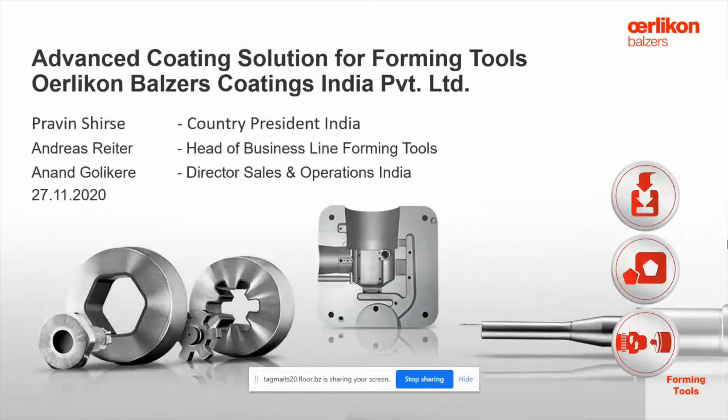I'll give you a brief introduction about the Oerlikon Surface Solution India footprint. We are present in almost all corners of the country.

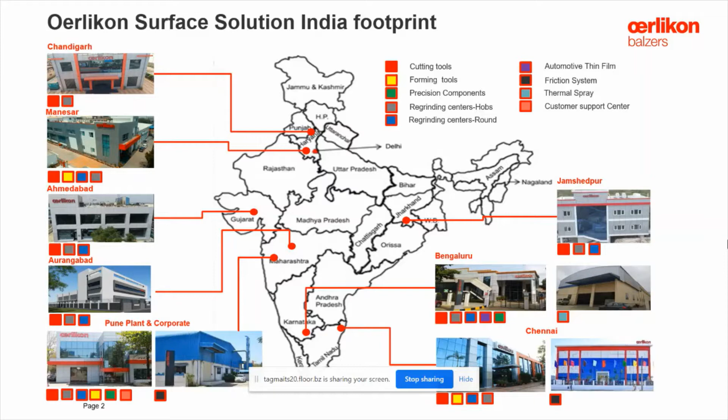All these coating centers are capable of handling various different forming tools. Now I would like to take you through the journey of coating forming tools with my colleague. I'm handing over to Anand Golikere.

Good afternoon all. I'll take you through the surface solutions we provide for forming tools. We provide surface solutions for a variety of applications in forming tools, which includes metal forming tools, plastic processing tools, and die casting tools.

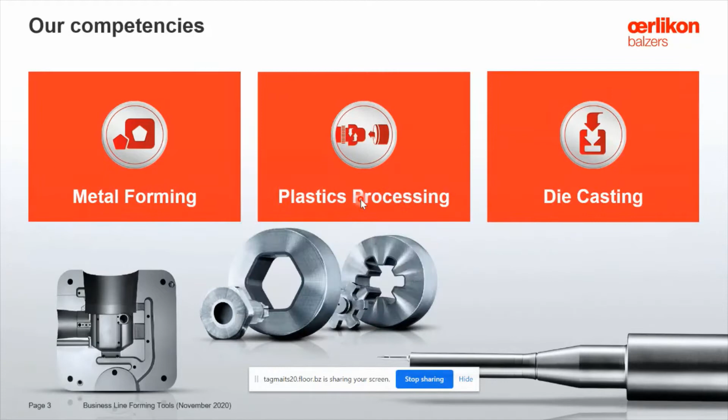Forming tools are treated with coatings under the brand names BALINIT and BALITHERM, which keep the tools in good shape. The main benefits customers get are reduced machine downtime meaning low production cost, longer tool life meaning low tooling cost, and higher workpiece quality meaning significantly less required rework.

This also enables forming of high strength steels or advanced high strength steels, which is the requirement of today's BS6 standard.

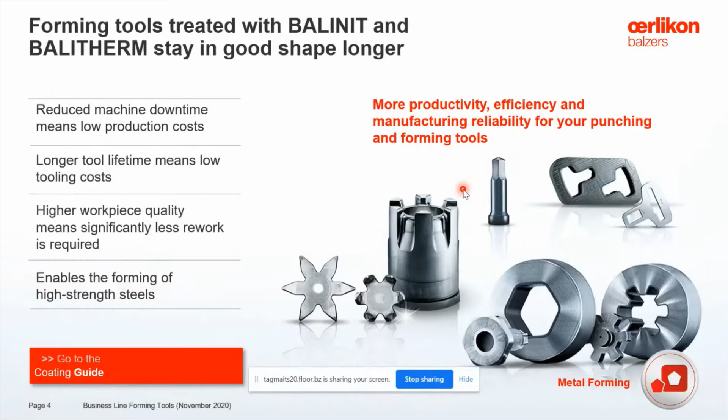With BALINIT and BALITHERM surface solutions, we guarantee more productivity, efficiency in manufacturing, and reliability in your punching and forming tools. We provide solutions for a variety of applications like segmented dies, roll forming, trimming and fine blanking, draw rings, and also large automotive stamping tools.

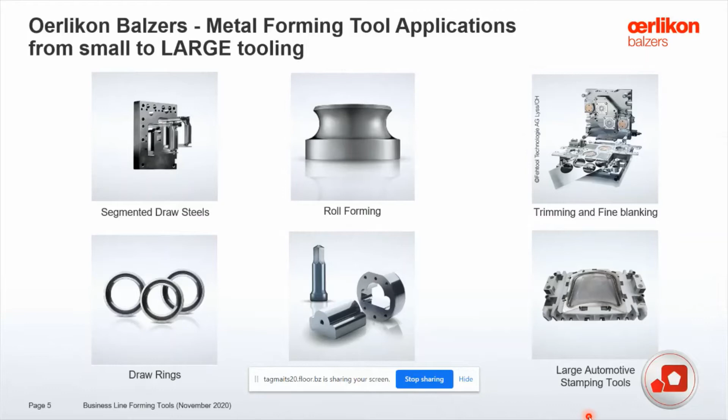Typical surface protection procedures for automotive flanging dies. We have a variety of solutions for the variety of materials to be formed, depending upon the material - aluminum, steel, or advanced high strength steel.

We provide these surface solutions on tool steels, which can be made of different materials, but the most commonly used is cold work tool steel like AISI D2 grade. Here the basic requirement is that it has to be well heat treated, and the tempering temperature should be above 510 degrees centigrade.

We do surface treatment or surface preparation with a variety of polishings, including technical polishing. Depending on the material formed, like aluminium, we have surface solutions like BALINIT Triton or BALINIT Hard Carbon. For steels, for skin parts dies, we sometimes also do laser hardening, and for big tools we have pulse plasma diffusion treatment.

For advanced high strength steels, we have BALINIT Advanced or BALINIT Duplex solutions, which are usually applied by physical vapor deposition coatings, at a process temperature of 480 degrees centigrade.

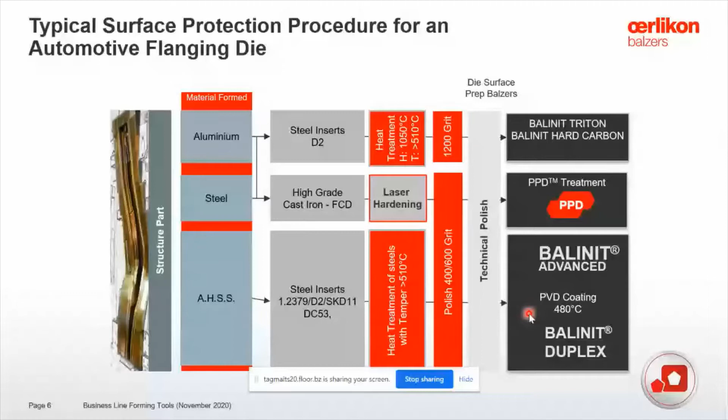Before coating, we have a high level of polishing, and we differentiate the polishing level. In the dies, there are some areas where no polish is required - this is the outer side. In the main forming area, we do technical polishing, and there are certain areas where we require only a technical gloss and not the high level.

We do all the requisite polishing, and for this we have the necessary setups at almost all plants. We have developed 3 competence centers for forming tools, one each in Manesar, Pune, and Chennai.

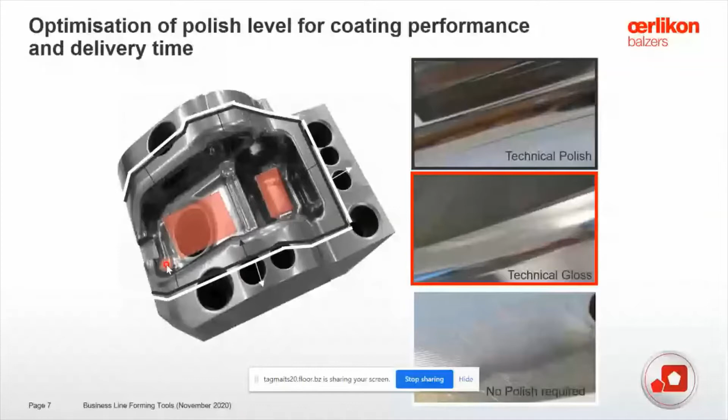Surface solutions on metal forming dies - we have advanced surface solutions like BALINIT Formera, a chromium aluminum based coating. The hardness of the coating is around 28 plus minus 2 gigapascal, which is approximately 3000 Vickers.

This is significantly higher compared to the material formed. Compared to the die hardness, which is around 58 to 60 HRC, this coating is about 3 times harder. The coating deposition temperature is around 480 degrees centigrade, and the color of the coating is light silver gray.

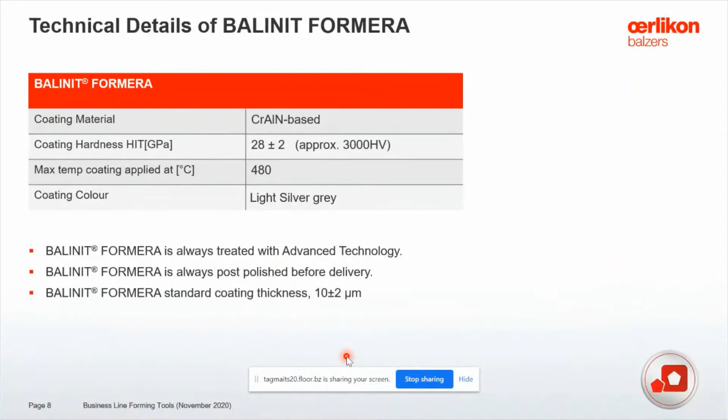BALINIT Formera is always treated with advanced technology, meaning we have a pre-treatment below the surface and then BALINIT Formera on top. It's always post-polished to give significantly higher tool life and top-notch components. The typical coating thickness applied is 10 microns, plus or minus 2 microns.

Some examples or case studies. This is an example for high strength low alloyed 6 millimeter thick forming. Here we are giving earlier solutions of BALINIT XCELL, which was now converted to almost BALINIT Formera with almost 5 to 6 times tool life. And here you can see the tool steel is K340, and this is also nitrided.

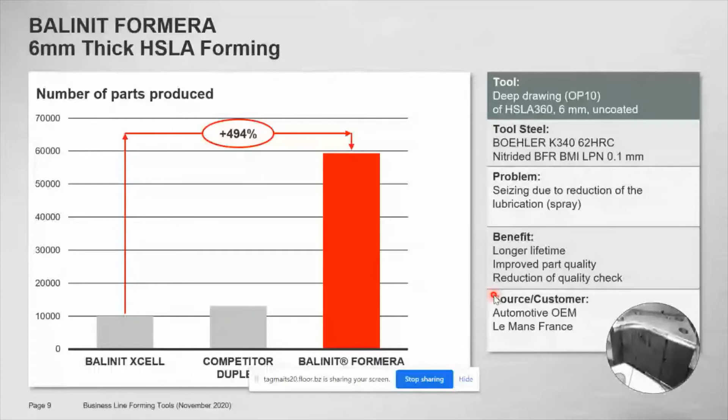The main problem of seizure due to reduction in lubrication spray was achieved. The customer benefited with longer tool life, improved part quality, and reduction of quality checks. The tool can be used for significantly longer time without mean time between maintenances.

Another example for BS6 standard automotive, we have high strength steels. This is an example of 960 megapascal, 2 millimeter thick deep draw. Here, the competitors were providing CVD treatment, chemical vapor deposition, commonly used in the past. But with our solution of BALINIT Formera advanced, we could give almost 8 times tool life to the customer. Short tool life was the major problem, and here we gave more than 8 times, and this is a customer in our UK facility.

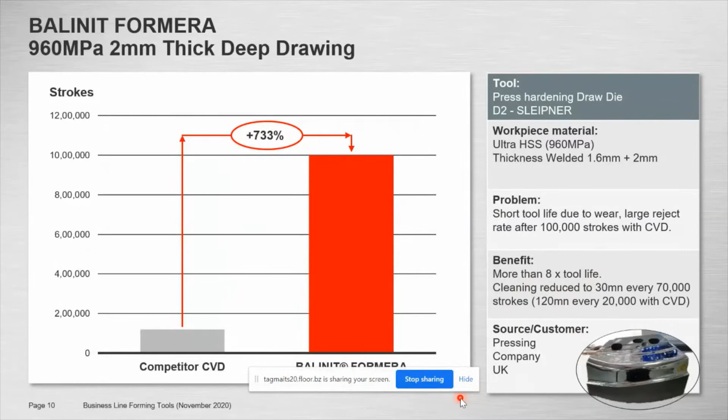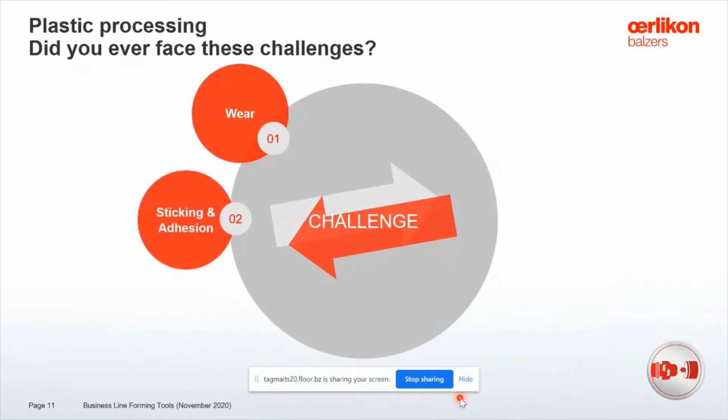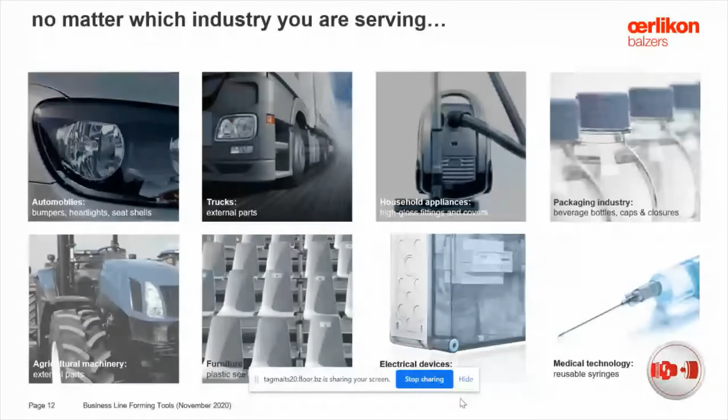In plastic processing, we have a variety of problems like wear, sticking or adhesion, frequent cleaning cycles, bad release properties or difficulty in ejection, sometimes corrosion due to additives in the plastic, and also scratches. No matter which industry you are serving, maybe automotive, trucks, household appliance, packaging industry, farm equipment, furniture, electrical devices, or medical technology, Oerlikon Balzers can solve your challenges in a variety of applications.

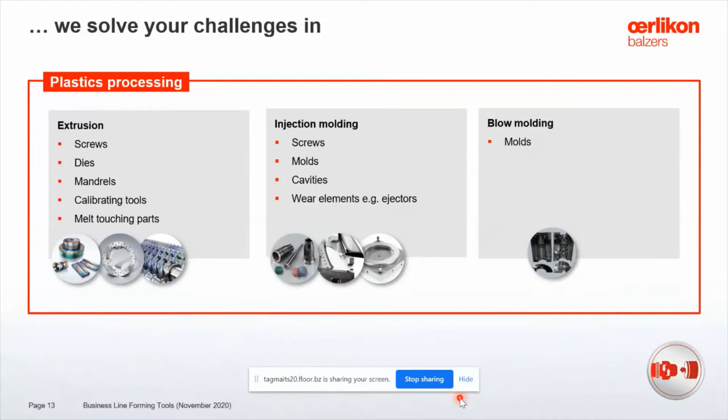In extrusion, we can coat screws, dies, mandrels. In injection molds, we can also coat screws, molds, cavities, and molds for blow molding. For the mold cavities, we provide protection against abrasive wear, corrosion resistance, and also against deposits and sticking. Improved mold filling and easy demolding is the added advantage one can get.

For the moving elements, we have special coatings like diamond like carbon coating or hard carbon, which we can also run lubrication free, especially in packaging industry or medical industry. The surface solutions for significantly higher life are applied by PVD, and we have a variety of solutions like BALINIT D, CROMA PLUS, LUMENA, or BALIQ TISINOS.

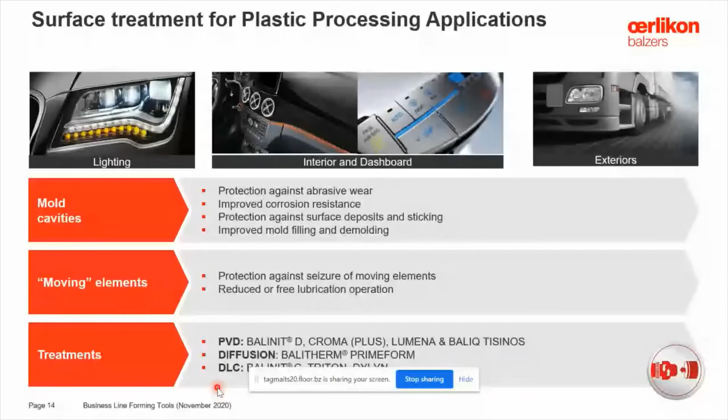The diffusion type, we have BALITHERM PRIMEFORM, and for moving elements, sliding elements, moving cores, we have diamond carbon coating, which has metal containing BALINIT C, or metal free diamond like carbon coating like BALINIT Triton, or special for packaging industry BALINIT DYLYN.

BALITHERM PRIMEFORM is a maintenance friendly surface treatment. Typical hard chrome coated tools, if the tool gets damaged, people also do welding, but the welding is below the surface and the surface treatment above cannot protect the area which normally gets damaged. But with our PRIMEFORM treated, maybe a P20 tool steel with 32 HRC, the prime form treatment is below the surface.

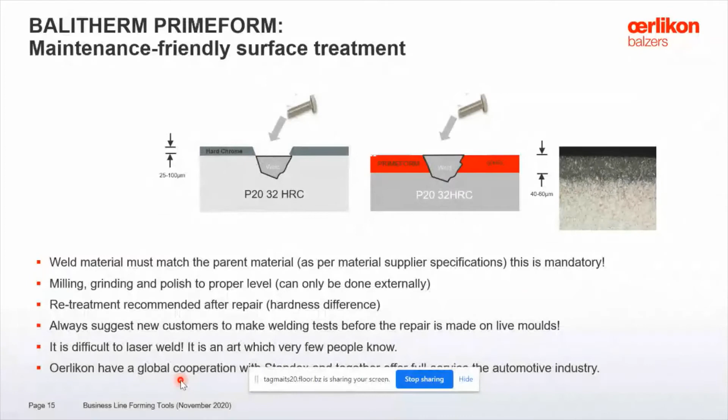Even with damages, the weld will be at the same level, and we can redo the treatment for protection of dies. So this can be maintenance friendly. The dies can be maintained, or even if there is an engineering change, this can be incorporated with BALITHERM Primeform treatment. Of course, it is difficult to laser weld, but we have recommendations based on that. We, Oerlikon Balzers, also have a global cooperation agreement with Standex, who are the leaders into mold maintenances and surface solutions as well.

Example, we are working together for mirror polished molds for automotive big lighting molds. You can see here the level of polishing which is maintained. We are coating these molds in a typical coating cycle. You can see here the picture.

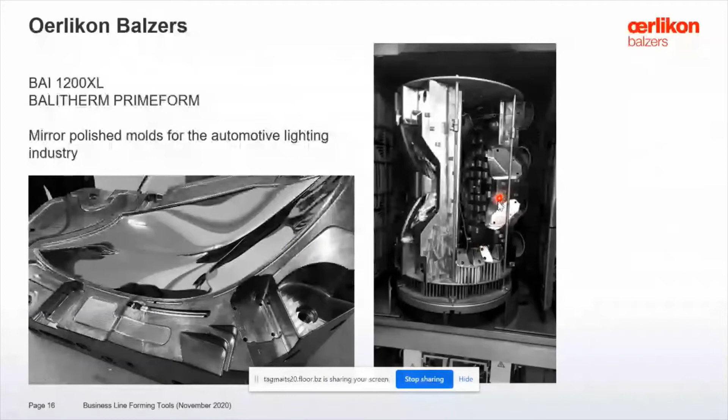After BALITHERM Primeform, the customer experienced improved part quality, lower injection pressure, less residue deposits because the treatment itself forms a protective layer and separates the melt from the tools. The mold cleaning cycles or intervals between maintenance are significantly increased.

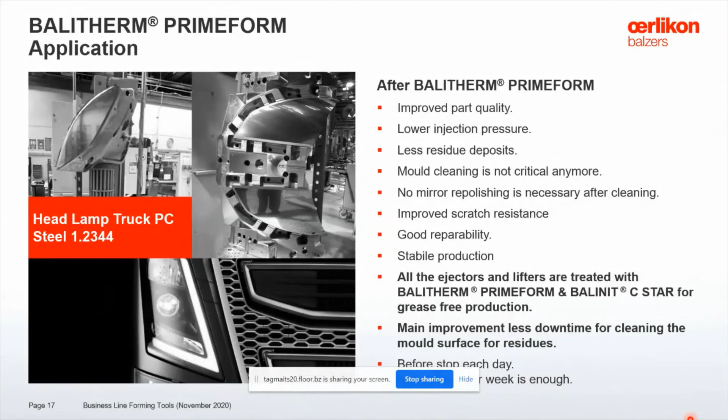Here, all the ejectors and lifters are coated with BALITHERM Primeform and BALINIT C Star to make it grease-free or dry lubrication or dry running. The main improvement is downtime. Earlier the mold used to stop each day, and now it is going without stoppage for even more than weeks together.

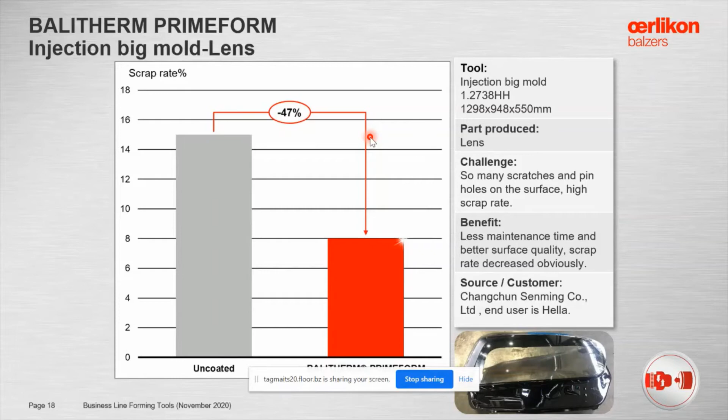This was an example from China, just an example. The tool steel was 2738 high hard material. It's a lens, so many scratches and pinholes on the surface. After treatment, almost the scrap rate is reduced by almost 47%. This was a customer, end user is Hella, which is also a leader into lighting molds. So these benefits can also be provided here.

Coatings, we have another range which is applied by BALIQ, a new technology called scalable pulse power plasma. This combines the advantages of arc treatment and sputtering, HiPIMS, and gives the smoothest coatings with this technology. Even this technology is available in India at our Pune plant.

To give an example for BALIQ TINOS, this was a case where the mold material is hot die steel, and it's a dust container. The polymer is polycarbonate or ABS, and the problem was cleaning and repolishing after every 500 shots. After TINOS, we could double the life of the meantime between maintenances, and even after 100,000 shots, the cleaning cycle is very easy and simple - just ultrasonic, you can reuse the mold, no major polishing required. The hardness of the coating is around 2,800 Vickers with 2.7 gigapascal residual compressive stress, and the friction coefficient gets reduced to 0.6, which helps in easy ejection of the molded components.

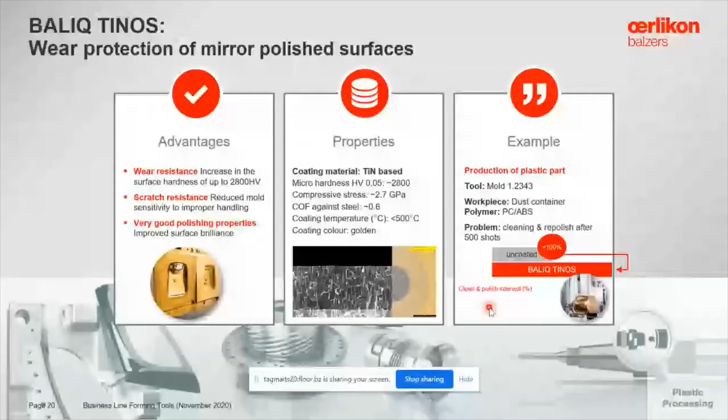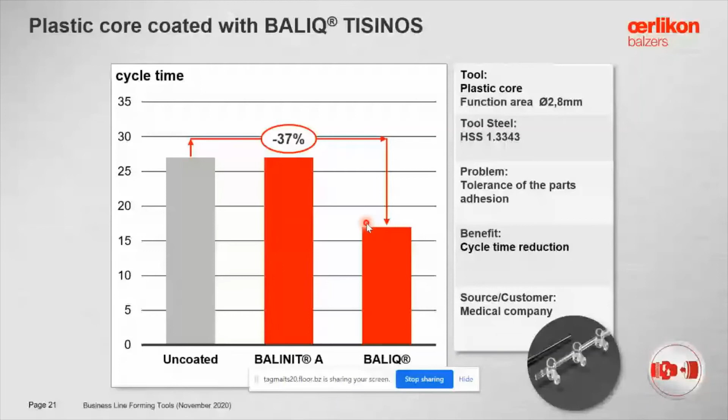We have special coatings like BALINIT CROMA PLUS, a strong performer for rubber and plastic forming. This provides high level protection against abrasive and corrosive wear. It's a multi-layer structure with more than 28 to 32 layers with very good sliding behavior, chromium and chromium nitride based for better corrosion resistance. The coating has a max service temperature of 700 degrees centigrade and has a rainbow color. We recommend this coating especially for PVC molds or rubber molds.

Here's an example: the tool steel is hot die steel, and this is an NBR seal ring. Here we prevented deposit formation, greatly reduced the sticking, and achieved excellent protection against scratches - almost a 3 times life improvement.

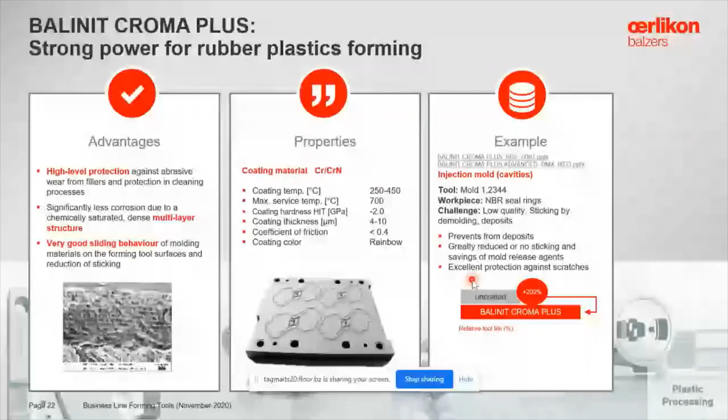Another example for injection mold for rubber, this time with a different rubber, EPDM - glass seals for automotive. Here we saw frequent shutdowns; the challenge was frequent shutdowns due to mold surface sticking easily. But after coating with BALINIT CROMA PLUS, we could improve the tool life by almost a factor of 5 times more life. This is also a customer from China in Wuhan, Hutchinson Automotive, for rubber products.

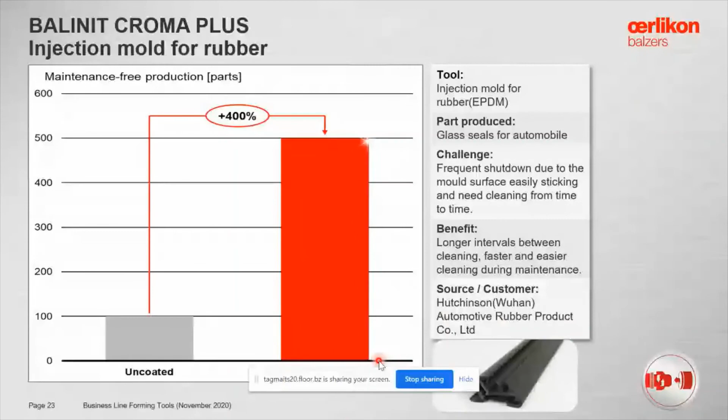In metal die casting, we also provide long-lasting, more productive manufacturing reliability. Here the reduced melt alloying on the tools is due to the coating property. The coating is ceramic in nature, so it clearly prevents the contact of molten aluminum or zinc with the die steel. It protects against corrosion, erosion, and oxidation of the molds or die casting tools. Premature heat checking is also prevented, and better surface quality and higher manufacturing reliability is guaranteed.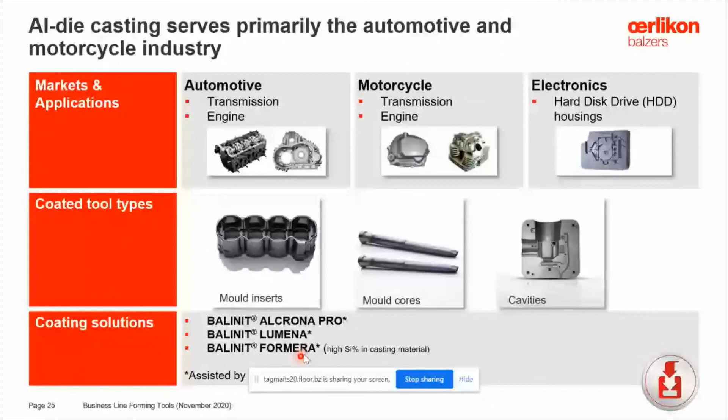In die casting, typical wear problems are opposite - they normally get erosion and metal sticking or alloying. These problems can be prevented by surface solutions from Oerlikon Balzers, and we can also delay the heat checks significantly.

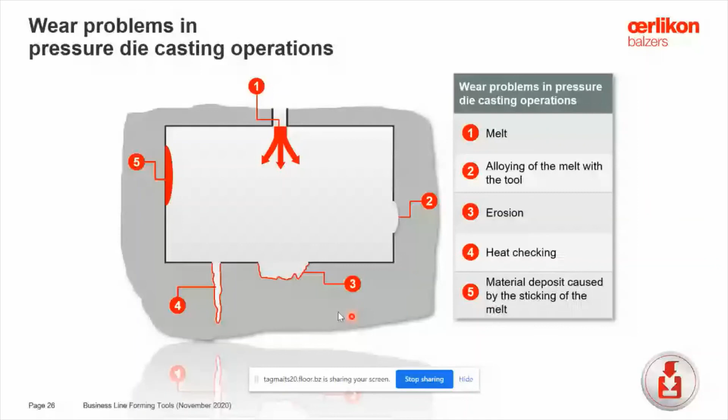Some case studies here for the core pins: the material is hot die steel SKD 61, for the engine cylinder block. The main challenge was heavy erosion after thousands of shots - 6,000 shots. After coating, we could see it reach almost 11,000 shots, an 83% life improvement. This customer is also global - Nemak.

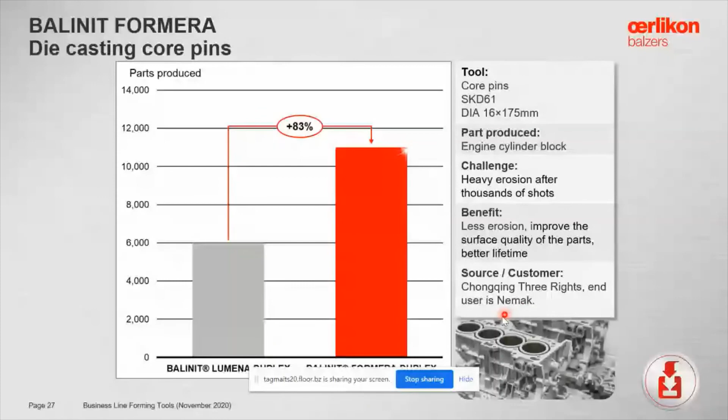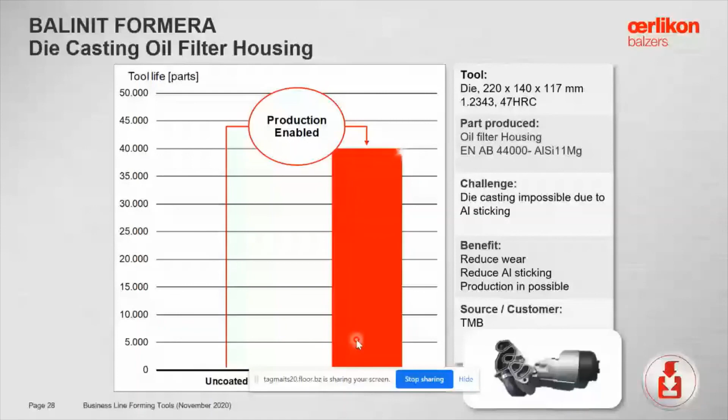Here we also provide BALINIT Formera for die casting, currently under testing for die casting of oil filter housing. We saw significant improvement, and this enabled the production. Earlier, die casting was impossible due to aluminum sticking, but after BALINIT Formera coating, we could produce at least 40,000 components. This was an oil filter housing, aluminum silicon with 11% silicon and magnesium.

So this is a brief overview of the various solutions that Oerlikon Balzers can provide. As my colleague already highlighted, we have 9 factories across India, from north to south and east to west, and we'll be happy to serve or meet your requirements. Thank you.